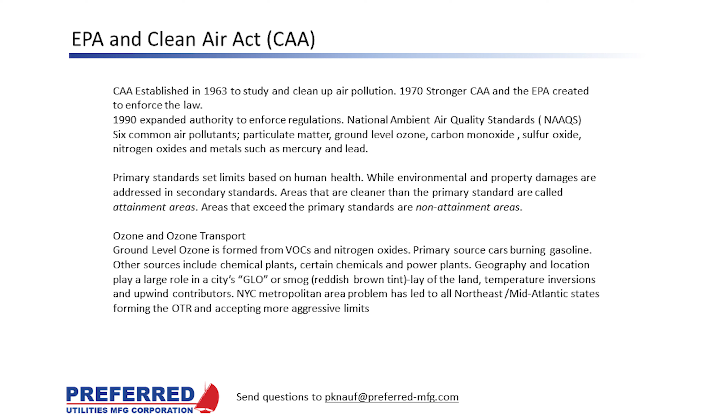For example, the New York City metropolitan area has a large problem, and that's led to the formation of the Northeast Mid-Atlantic states, forming the OTR, or Ozone Transport Region, and they've accepted more aggressive limits to their emissions.

So these are the Clean Air Act National Ambient Air Quality Standards table. You see carbon monoxide standards of 9 ppm, nitrogen dioxide primary standard of 100 parts per billion, ozone, particulate pollution, and sulfur dioxide. The limits can be lower in certain regions, but cannot exceed these national standards.

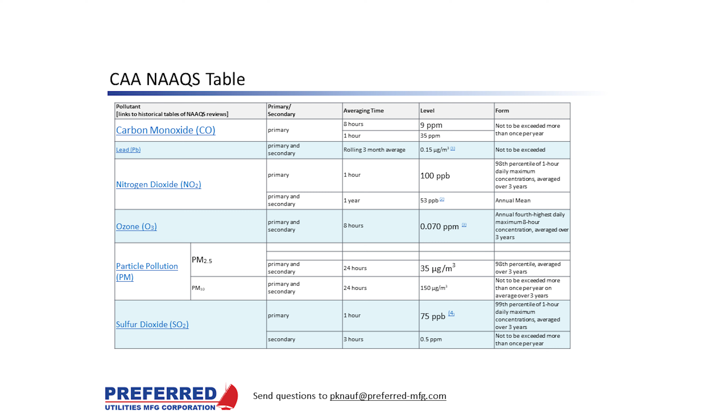If you ever notice a spec or documentation, quite often it's expressed in pounds per million BTU. This is the way you convert from parts per million to pounds per million BTUs for the various fuels, as well as for the chemicals, the pollutants that we are going to be talking about today. So this is a handy chart to print out and save.

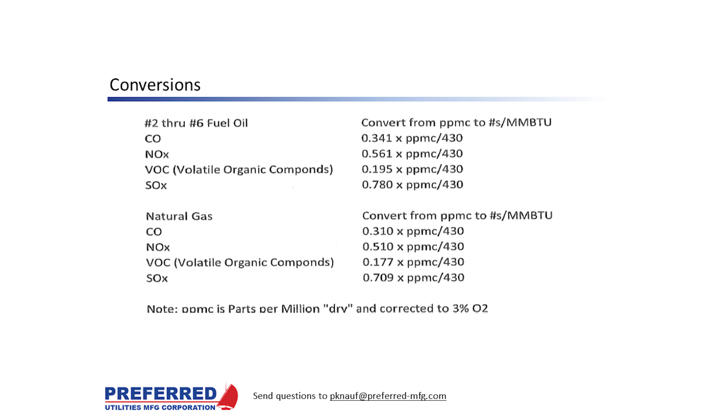Surveys show that the public perception is we are emitting more today and air is getting much worse. Despite this overwhelming perception, the U.S. is doing quite well. Actually, the developing nations are contributing to most of the world's pollution.

As you can see in this table, the EPA is tracking air quality from 1980 to 2018. Carbon monoxide emissions have gone down by 83% in those 38 years, lead by 99%, primarily through taking lead out of car fuel, gasoline. Nitrogen dioxide is down by 65%. Ozone is down by 31%. They didn't collect particulate matter data back then, not until 2000. And sulfur dioxide emissions are down by 91%.

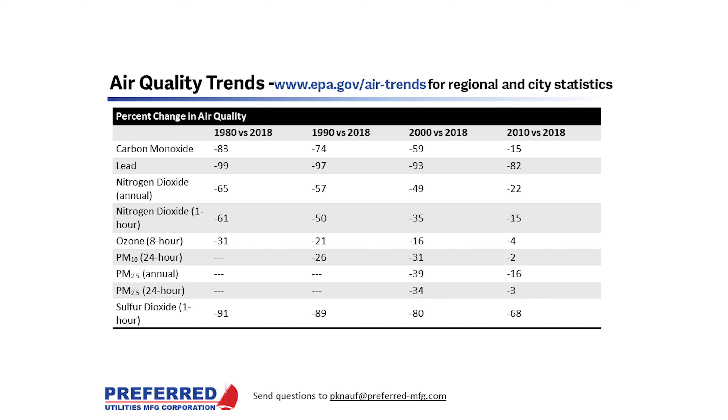Here's another way to look at it, a nice, little easier graph, where the center line of the x-axis is the most recent national standard. As you can see, all the various pollutants are tracking down and are considerably below, most of them are considerably below the national standard.

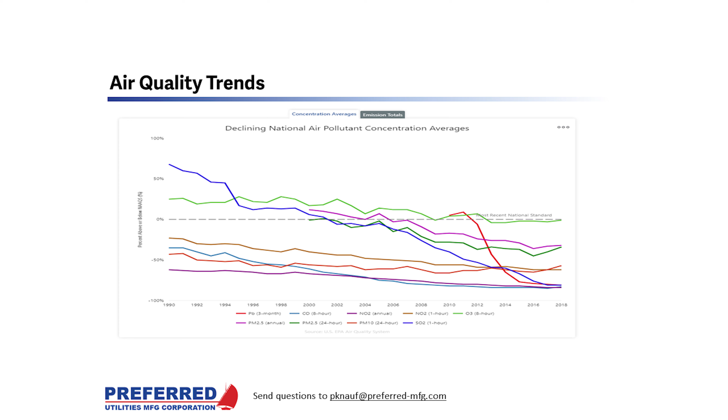The U.S. NO2 air quality from 1980 to 2018, as you can see, we're above what is now the national standard of 100 early on, but about the early 2000s we dropped below that standard, and today we're quite a bit below that. That's measured as the daily max 1-hour average.

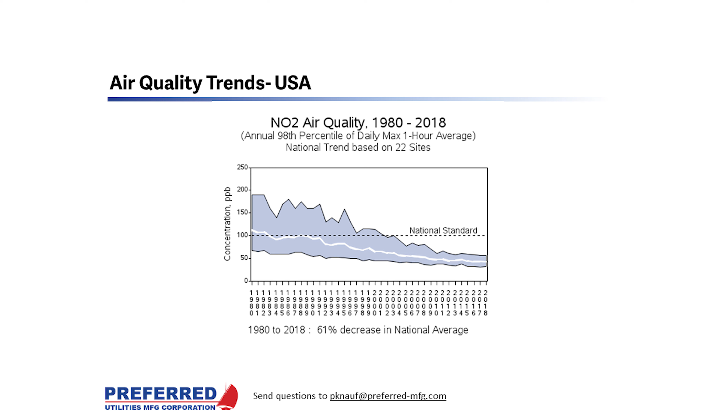Since most of us are in the Northeast, this is a graph showing the Northeast emissions from 2000 to 2018, the same daily max 1-hour average. So that's a 34% decrease in the regional average.

There are three main ways to reduce emissions: pre-combustion choices, combustion methods, and post-combustion methods. We're going to discuss those separately.

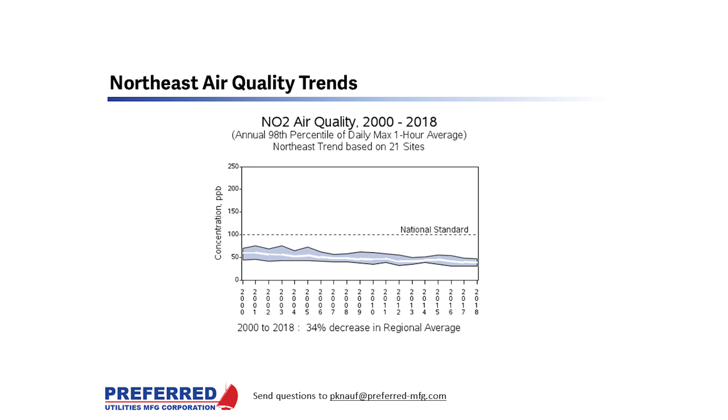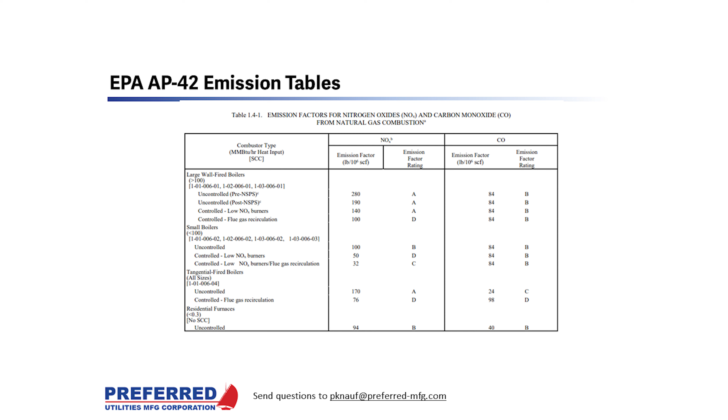The emission factor rating simply indicates the quality of the data, the number of sample sets that they have to back this data up.

Another table here shows emission factors for the criteria pollutants and greenhouse gases from natural gas combustion, listed as carbon dioxide, lead, N2O, particulate matter, sulfur dioxide, total organic compounds, methane, and volatile organic compounds.

Now, most of these statistics you're going to see are going to be corrected to 3% oxygen. It's very important that you do that, since not many installations are right at 3%. So when you look at the raw data, you must always correct it to 3% oxygen.

David, is that wet or dry oxygen? It really doesn't matter. If you're measuring NOx wet, you would use your wet O2. If you're measuring NOx dry, you would use your dry O2. As long as you're consistent, the formula works.

It is important to note that combustion has pass-through components. Pollution from sulfur, lead, mercury, and particulate matter are not influenced by combustion technology. They're in the fuel and pass through the combustion process.

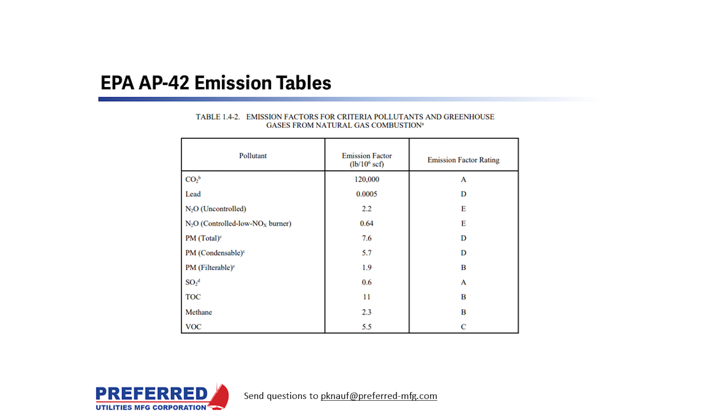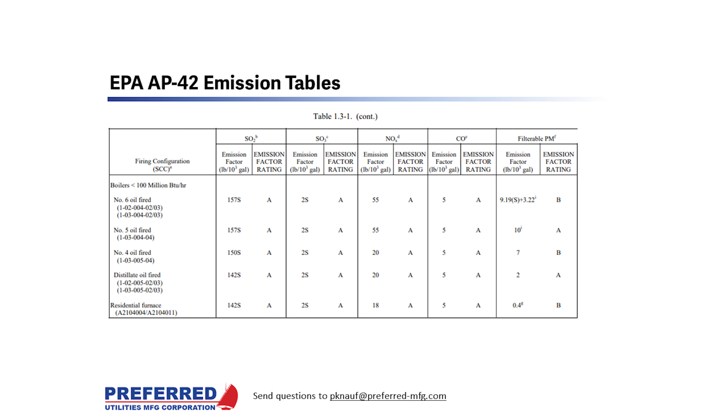Table 1.3.1 shows various fuel oils' expected emissions for SOx, NOx, and CO for different size types of fuel oils. It's important to see the differences in residential furnace emissions as well, compared with the previous slide on natural gas emissions. So far, we've discussed pre-combustion techniques to reduce emissions, mainly fuel selection.

Next, we'll talk about operational changes, but I want to take this time to point out the EPA website and the wealth of information available there. Earlier, you saw air trends that came right off the EPA website, and recently you saw statistics on fuel characteristics. All this and more information is available at epa.gov.

So next we're going to start talking about operational changes to reduce emissions. Obviously, there are things like good boiler tuning and lean excess air that can improve performance and efficiency in any operation. But mainly we'll be discussing the reduction of pollutants that are not pass-through pollutants, by optimizing combustion and efficiency through improving the combustion process.

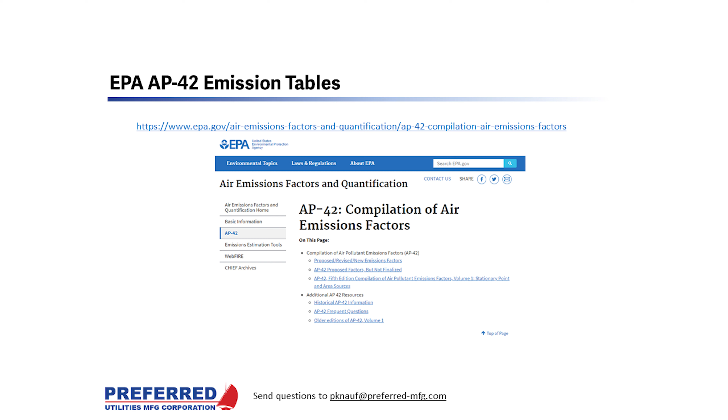Focusing on NOx emissions, NOx is usually 97% nitric oxide and 3% nitrogen dioxide, but it is formed in three distinct ways: fuel NOx, thermal NOx, and prompt NOx.

Fuel NOx is oxidation of the nitrogen molecules attached to the hydrocarbon chains inside the fuel. Thermal NOx is NOx formed by disassociating nitrogen molecules in the air that join with the oxygen in the air to form nitric oxide. So two distinct different areas and sources for the nitrogen.

And finally, prompt NOx, which is formed from the rapid reaction of atmospheric nitrogen with hydrocarbon radicals.

Now, I wanted to insert here where we've seen pollutants characterized in a few different engineering units. When you see pollutants characterized as parts per million, it's important that you correct for the oxygen level in the stack, because that influences the statistics.

You take the formula shown here: actual NOx times (20.9 minus 3) divided by (20.9 minus your actual measured oxygen). And this works for CO as well as any of the other stack pollutants.

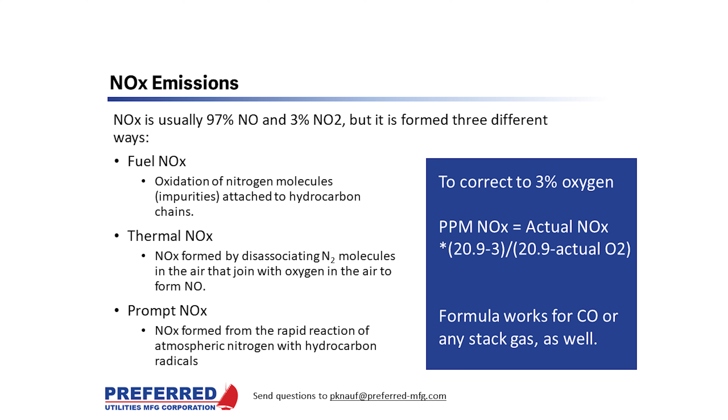Fuel NOx reduction involves the oxidation of the fuel-bound nitrogen molecules attached to the hydrocarbon chains. For single burner boilers, the only way to reduce it is by burning cleaner fuels. Multiple burner boilers, larger boilers, can use fuel staging techniques to reduce NOx.

The strategy there is to convert the hydrocarbon fuel to carbon monoxide in a sub-stoichiometric or fuel-rich environment, and then convert the CO to CO2 and water vapor in a high excess air environment.

This can be done in utility boilers through burner tuning, over-fire air ports, and putting some burners out of service. Obviously, these methods are not available in a single burner boiler or furnace, and the only way to achieve that is by changing the fuel.

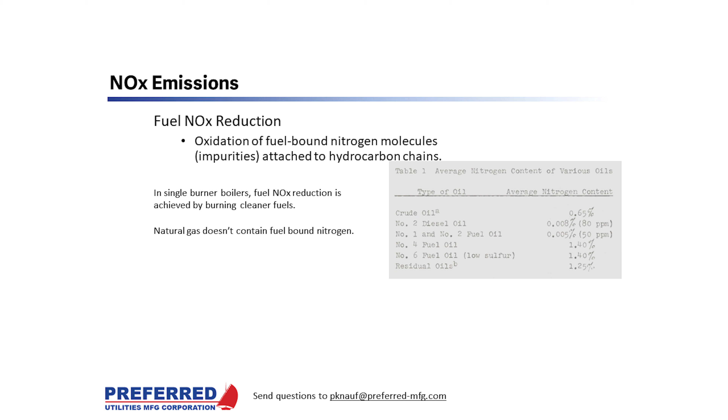Thermal NOx reduction: the disassociation of nitrogen molecules in combustion air follows an Arrhenius relationship, meaning the percentage of nitrogen molecules broken into nitrogen ions has an exponential relationship to temperature.

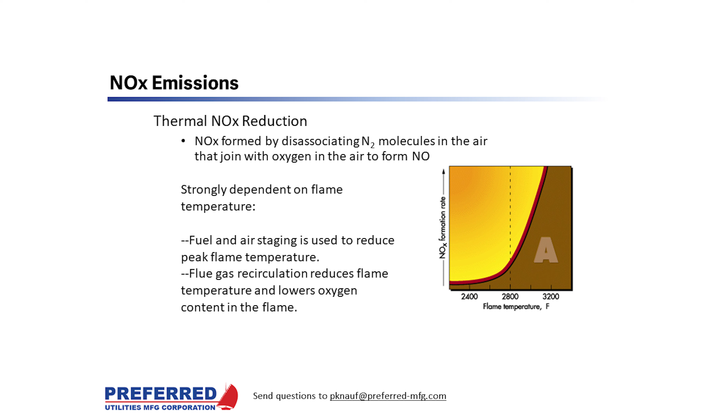To reduce thermal NOx, combustion engineers reduce the peak temperature of the flame. This is done with burner fuel and air staging to slow combustion, and flue gas recirculation that spreads the enthalpy of combustion over a higher mass flow, lowering the oxygen content at the flame so more nitrogen radicals reform into diatomic nitrogen. Reducing oxygen concentration, increasing nitrogen concentration, reducing peak combustion temperature, and reducing the time combustion gases remain at elevated temperature all reduce thermal NOx formation.

FIR is a NOx reduction technique applicable to boilers that burn gaseous fuels only. It's similar to FGR, except a portion of the flue gas is mixed with the fuel instead of the combustion air. This technique lowers the peak flame temperature, reduces oxygen concentration in the combustion zone, improves fuel-air mixing, and reduces the time under NOx formation conditions.

When the same volume of flue gas is used, FIR can be more effective at reducing NOx than FGR. To minimize confusion, caution should be exercised when encountering the acronym FIR, since it's used to represent both fuel-induced recirculation and forced internal recirculation.

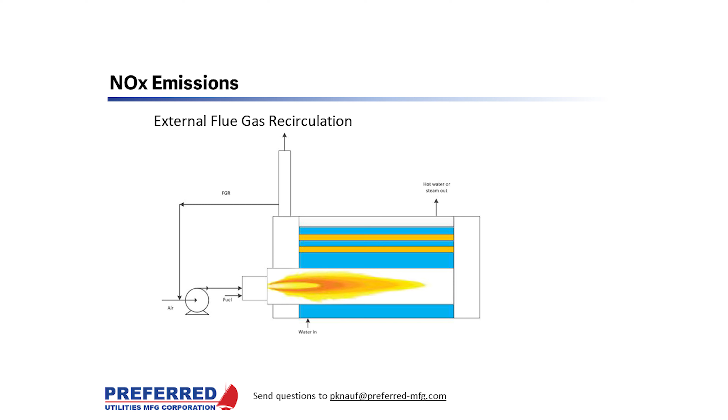This schematic shows external flue gas recirculation, which reduces combustion temperature by externally feeding flue gas from the stack or the last pass of the boiler back into the combustion air, where it mixes in the fan or wind box and is reintroduced into the furnace. It's very effective against thermal NOx formation, though this technology is a bit older, going back to the 1980s.

Prompt NOx: the most effective NOx emission control strategy reduces NOx formation as much as possible while affecting boiler performance as little as possible, except in advanced burner concepts where air and fuel are premixed. Combustion at either low or very high excess air levels results in low NOx formation. For most low NOx boilers, the best combination of low NOx formation and high boiler efficiency occurs when the oxygen amount is just enough to ensure complete combustion.

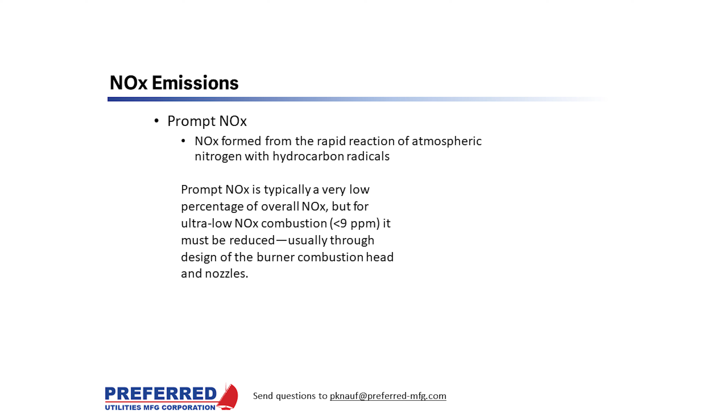Operation at very low excess air levels can cause problems. It can result in incomplete combustion and formation of CO, decreasing boiler efficiency. It can also create unsafe conditions inside the boiler that can lead to an explosion.

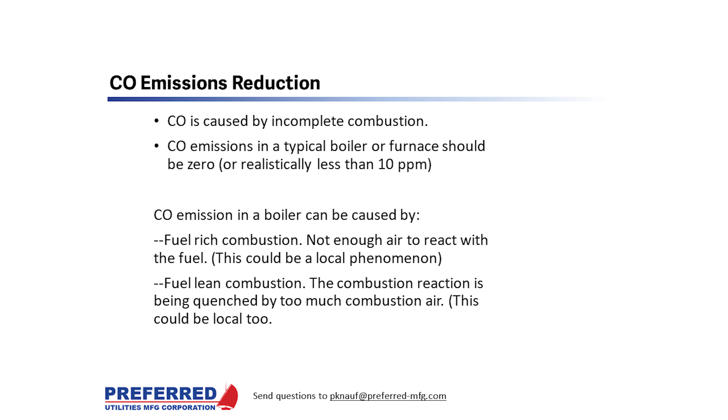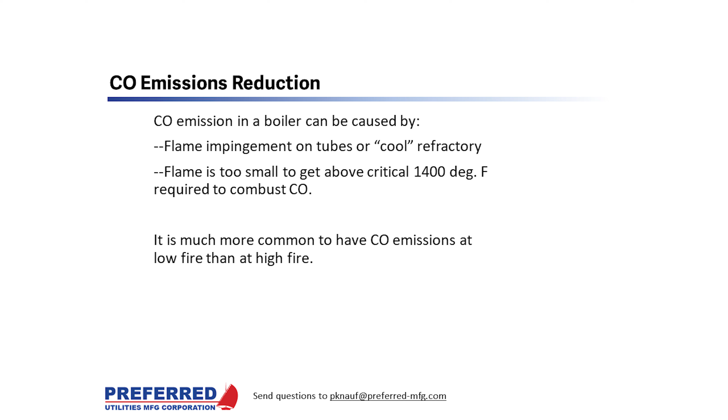CO emissions reduction: CO is caused by incomplete combustion. CO emissions in a typical boiler or furnace are realistically always less than 10 parts per million. CO emissions are caused by fuel-rich combustion with not enough air mixing with the fuel, or too lean combustion with too much combustion air. It can also be caused by flame impingement on the tubes, furnace wall, or cool refractory, or by a flame too small to get above the critical 1400 degrees Fahrenheit. It's much more common to have CO emissions at low fire than at high fire.

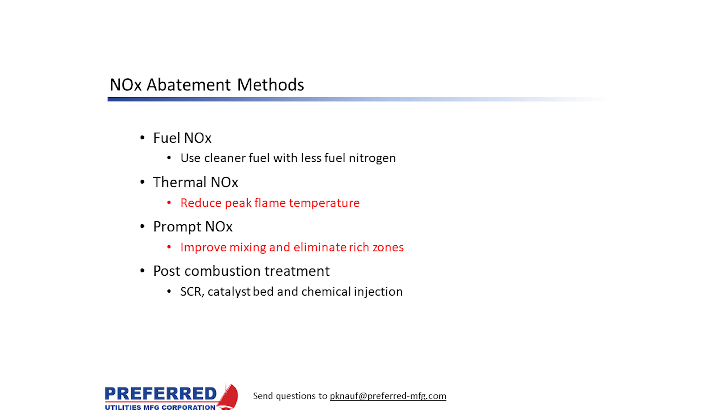Okay, so I'm Dave Eoff, sales manager at Preferred Utilities. I've been a burner combustion engineer since the early 1990s, and I actually worked in Southern California where low NOx technology really started with Rule 1146, which mandated that if your boiler didn't have a low NOx burner on it, you had to trash it and install one. So we were very busy retrofitting boilers to low NOx burners in the early 90s.

And as those slides from Peter show, we've done a very effective job at reducing NOx emissions in the United States - so much so that when folks like Peter and I talk about emissions, we assume we're talking about NOx, CO, and SO2. It seems like anybody under 30 doesn't really know what air pollution was in the United States.

So when you talk to them about emissions, they immediately start thinking about CO2. And CO2 is what we're going to talk about now, and how you can reduce CO2 emissions in the boiler.

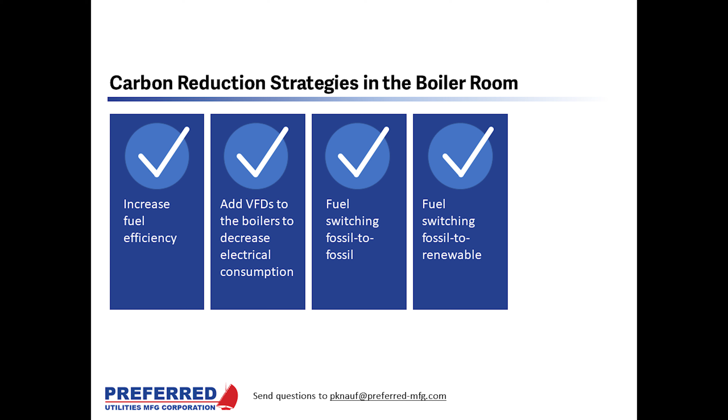We're going to start small and end big, beginning with fuel efficiency improvements you can make in the boiler room. It stands to reason that if you burn less fuel, you're going to release less carbon. We've been using various technologies over the last 30 or 40 years as fuel prices have increased to increase the efficiency of burners for the economic payback. But by decreasing the amount of fuel you burn, you also decrease the amount of CO2.

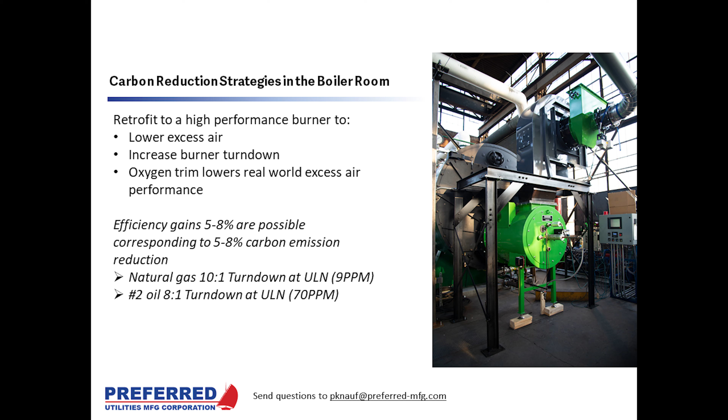So what you can do, you can retrofit to a high performance burner that will lower excess air, increase burner turn down, and if you employ a control system known as oxygen trim, you can lower your real world excess air, or operating excess air, even further. So efficiency gains of 5 to 8% of fuel consumption are possible, and that corresponds to 5 to 8% carbon emission reduction.

Another thing you can do is reduce the amount of electricity you're consuming in your boiler room. We do this by replacing across-the-line motor starters with variable speed drives. Usually we will start with the biggest blowers or motors in the boiler room, and that's usually the forced draft fans on the burners. We might put VFDs on the induced draft fans, and sometimes on the feed water pumps. But typically we start at the largest motor because that's where the ROI is the most, and that's the FD fan. The conversion between electricity and CO2 depends on where you are.

The way to calculate this is to go to the EPA's website. They have a calculator there called AVERT, which is an acronym for something or other. The national average is you release 7.07 times 10 to the negative fourth tons of CO2 per kilowatt hour reduced. That number varies from place to place depending upon how much fossil fuel is used to create electricity where you live.

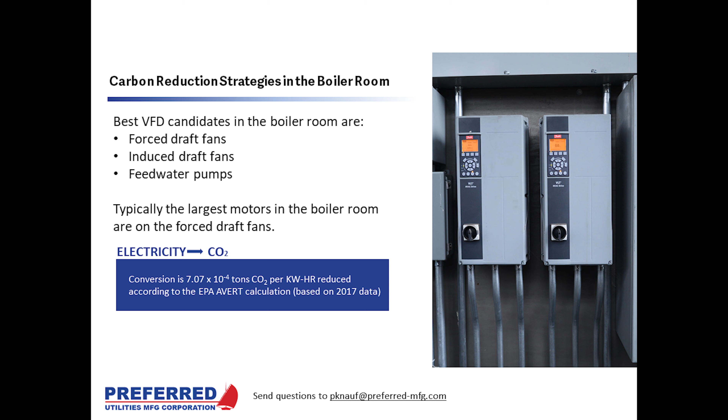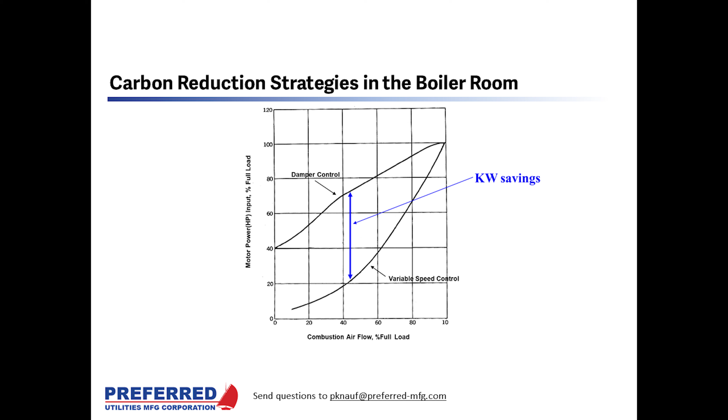When we put a variable speed drive on the FD fan, we'll use a little bit of damper control at low fire, but the goal is to get that damper open as quickly as possible as you move up to the higher firing rates. Once the damper is full open, then we start increasing the VFD speed. So that gap between the top curve and the bottom curve is your brake horsepower, or electricity kilowatt hour savings.

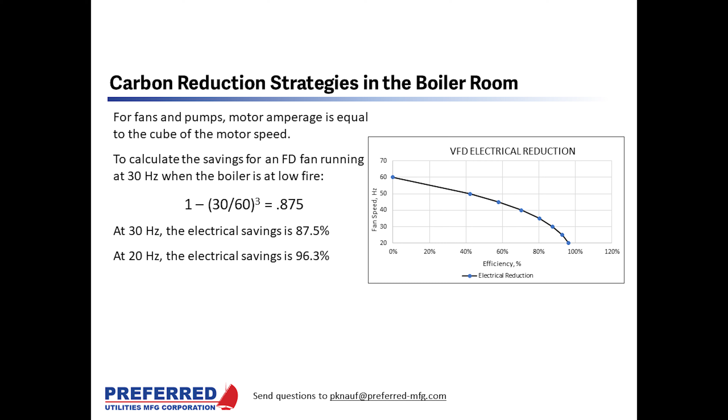This is the equation you use to calculate electrical savings for different VFD speeds: 1 minus your actual speed divided by 60, all to the third power. So if you run the FD fan VFD at 30 Hertz, your electrical savings is 87.5%. At 20 Hertz, the electrical savings goes to 96.3%. There's a lot of electrical savings to be had by slowing down your fans. The conversion, as a reminder, is 7.07 times 10 to the negative fourth tons of CO2 per kilowatt hour reduced.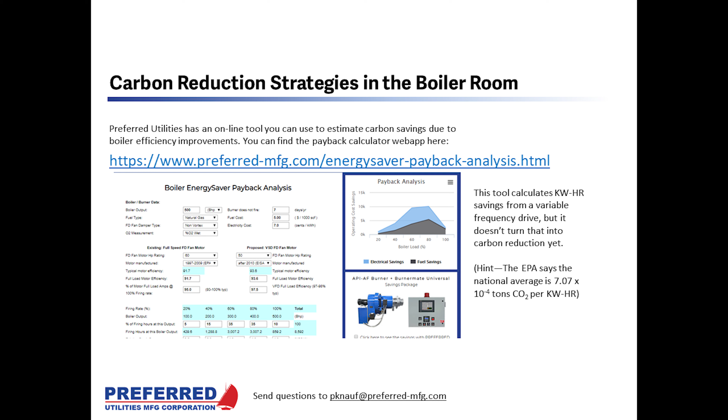To estimate the fuel and electricity efficiency gains possible with a burner and controls retrofit, you can use Preferred's online energy saver payback tool. You input the excess air, stack temperature, and load profile of your existing burner, as well as the performance of the proposed new burner, and the web app estimates your fuel, electricity, and carbon savings. You can input your fuel, electricity, and retrofit costs, and the web app will output an ROI for the upgrade. The web app doesn't calculate CO2 savings from the electricity reduction yet, but it's on our list of things for our programmers to do. For now, you can use the AVERT calculation for your region.

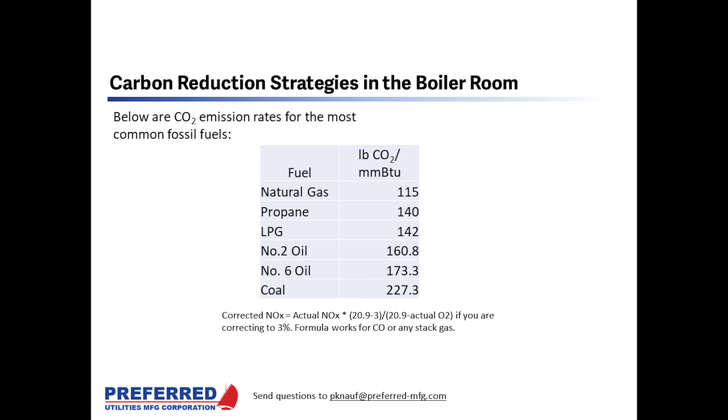So the second strategy you can use to reduce your CO2 emissions is to switch from one fossil fuel to another, switching from a very carbon-intensive fossil fuel to a less carbon-intensive one. This chart shows the pounds of CO2 produced per million BTU of different fuels. Natural gas is the lowest, and different types of coal are the highest.

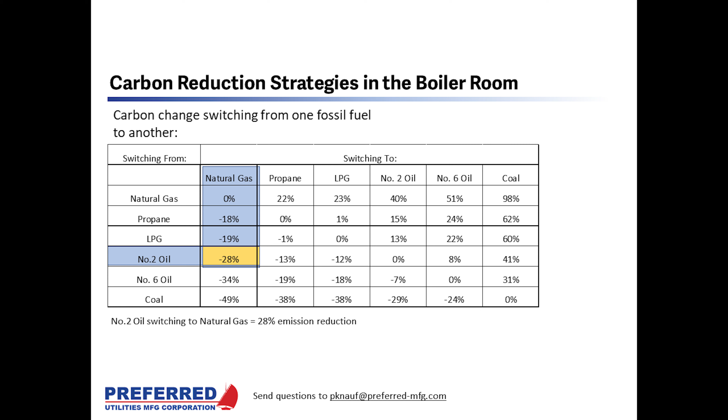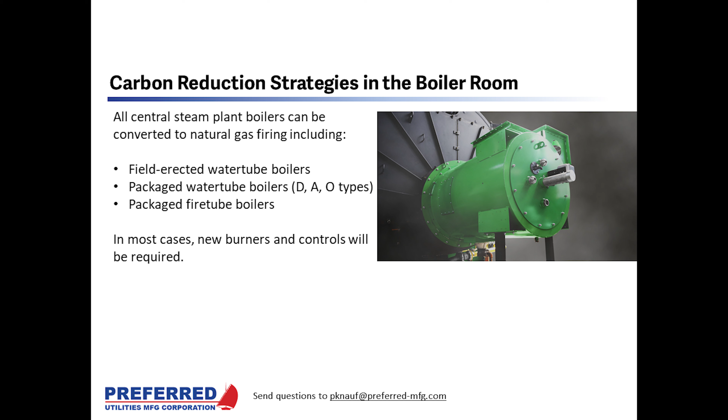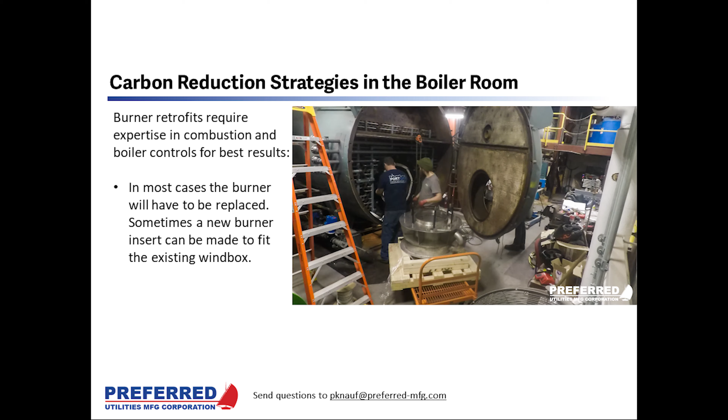Burner retrofits require expertise in combustion and boiler controls for best results. In most cases, the burner will have to be replaced. Sometimes a new burner insert can be made to fit into the existing wind box.

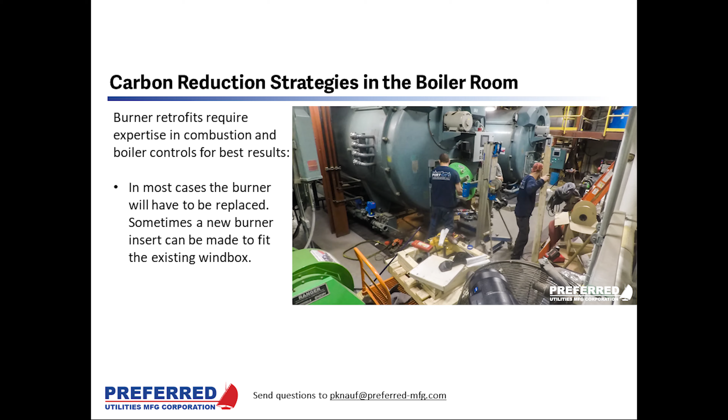This video shows a crew replacing the burner in a trademarked Cleaver Brooks boiler with a new preferred burner. As you can see, with guys working really fast, this was done in 41 seconds.

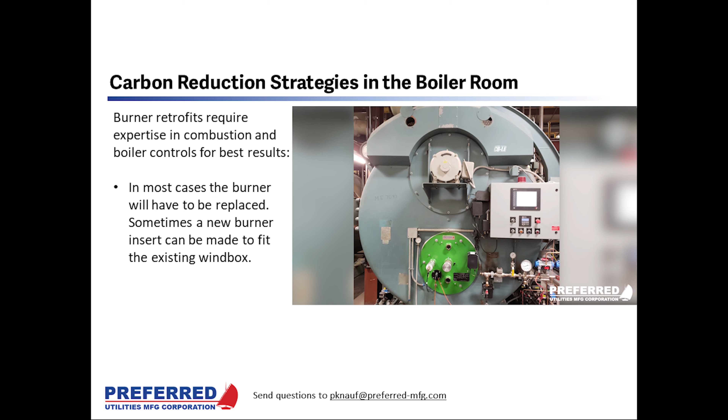This was a fuel switching project at Bates College, where they switched to a renewable fuel and achieved an 82% carbon emissions reduction, but I'm skipping ahead.

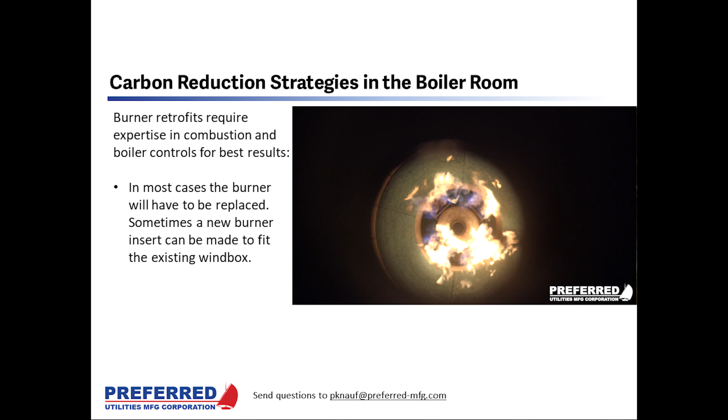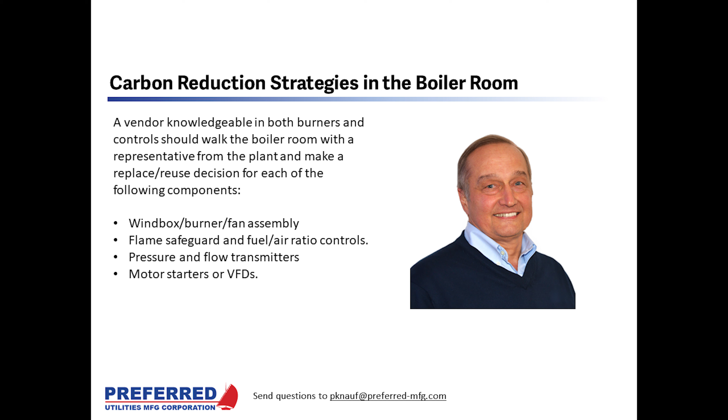When you're doing a burner retrofit, it's important to include a vendor knowledgeable in both burners and controls who will walk the boiler room with a representative from the plant and make a replace-or-reuse decision for each of the following components: the windbox burner fan assembly, the flame safeguard fuel-air ratio controls, instrumentation including pressure and flow transmitters, motor starters, and VFDs. Why spend money replacing perfectly good equipment if it will work with the new burner?

So the final carbon reduction strategy we're going to talk about is converting from a fossil fuel to a renewable fuel. The idea with renewable fuels is we are taking carbon that was already in the biosphere and burning it, not carbon that was 8,000 feet under the ground in the form of fossil fuels. So when we talk about landfill gas, digester gas, or some of the liquid fuels coming up in a few slides, this is carbon that was recently trapped and we're putting it back into the atmosphere, not long-cycle carbon from the dinosaur period.

Everybody in the boiler burner industry is familiar with landfill gas and digester gas. Both are renewable fuels made from renewable sources, and we've been burning these fuels since at least the 1980s. The problem is they're gaseous fuels that can't be economically transported any distance. Even if you had the real estate to put in a lagoon or a digester in the middle of your campus, you wouldn't want to because of the smell.

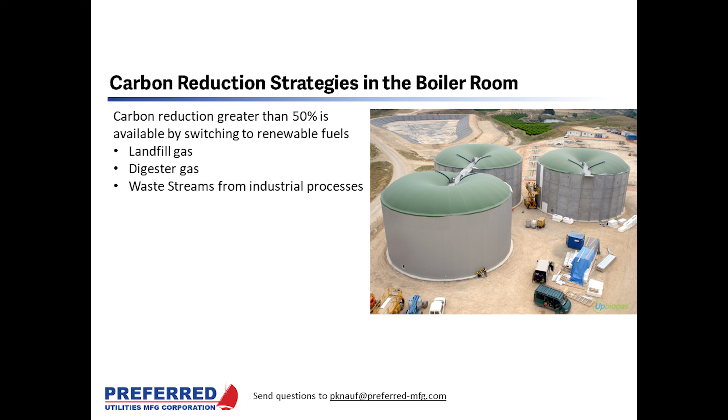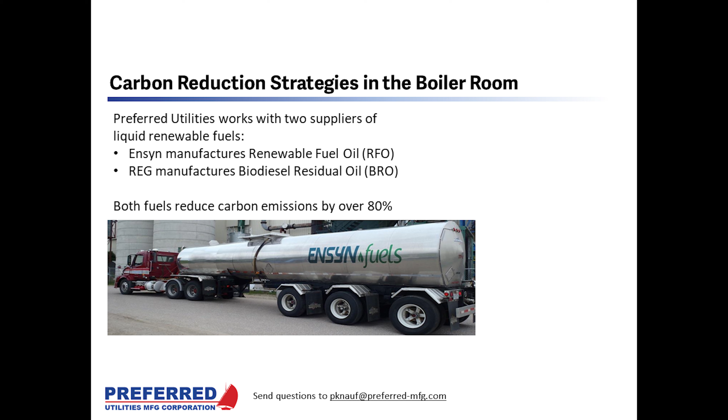Preferred works with two suppliers of liquid fuels. Ensyn manufactures a fuel called Renewable Fuel Oil, or RFO, and REG manufactures a fuel called Biodiesel Residual Oil. Both of these fuels are liquids, so they can be put on a truck or a rail car and delivered directly to your facility from where they're made. This unphotoshopped picture is proof.

Ensyn makes renewable fuel oil, or RFO for short. It's made from tree trimmings from harvest residues or commercial tree plantation thinnings. If this biomass wasn't made into RFO, it would be burned or left to decompose, and the CO2 would have hit the atmosphere soon anyway. RFO has been approved for all regulatory credits for renewable fuel oils, including RINs and RECs.

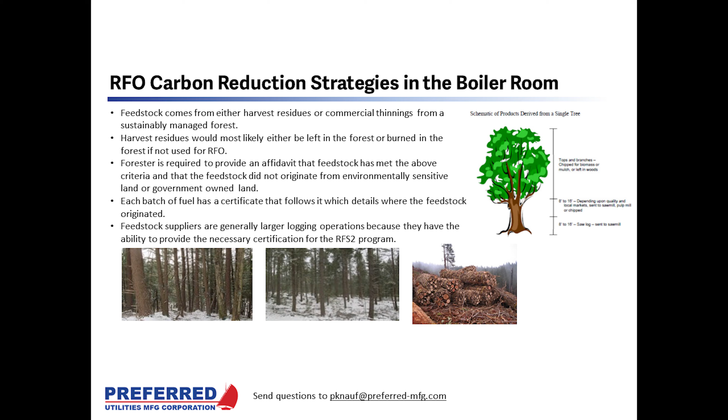This is a very simple diagram explaining where RFO comes from. The end products are liquid smoke, renewable feedstock sold to petroleum refineries, and RFO for steam and hot water plants. By the way, when you burn RFO in your boiler, it produces a very nice wood smoke aroma. RFO is considered to be biogenic.

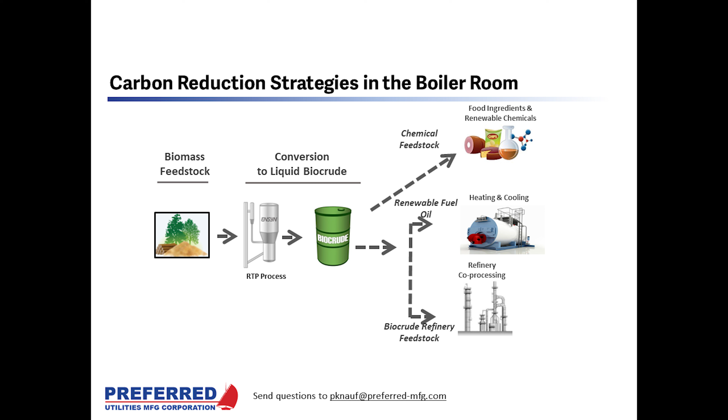Greenhouse gas emissions from RFO are about 88% lower than number 2 oil and 82% lower than natural gas. Virtually any fire tube or water tube boiler can be converted to fire RFO. RFO is acidic, so everything in contact must be made out of stainless steel.

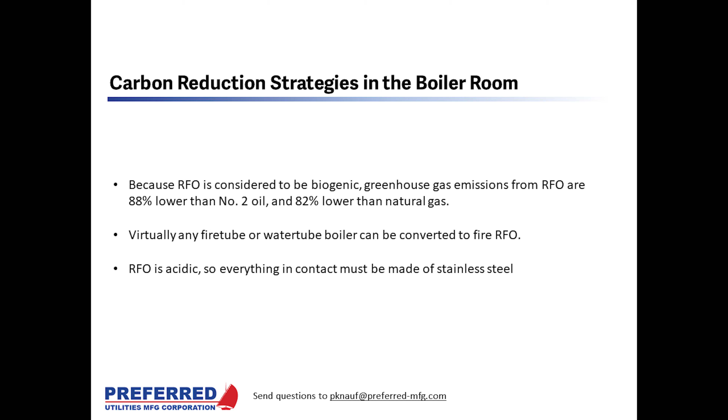The greenhouse gas emissions reduction for this fuel isn't 100%, because it does take some fossil fuel to make the renewable fuel and to transport it to the plant where it's going to be burned. Ensyn, the manufacturer of RFO, typically amortizes the cost of the fuel conversion in a 5-year fuel contract.

Even with the fuel switching costs, the price of RFO is close to the price of natural gas on a comparable BTU basis. Preferred has converted boilers at 3 facilities to RFO: Bates College, Youngstown Thermal, and a CRNC facility in Ontario, Canada.

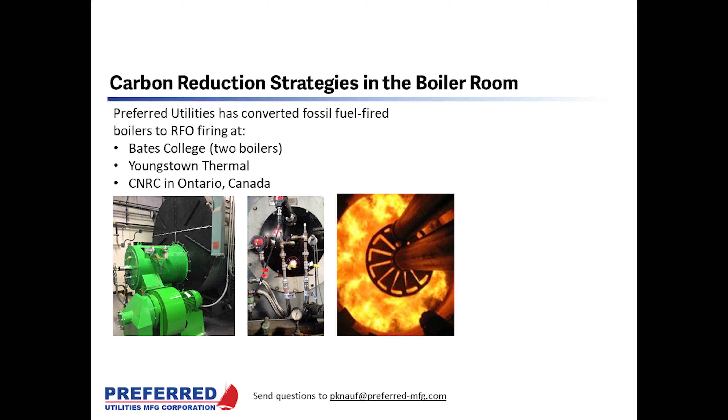The video I showed you earlier was Bates College. They've converted 2 of their central steam plant boilers to RFO. As soon as our technicians finished tuning up the new burners, Bates issued a press release touting their success reducing greenhouse gas emissions at their campus. The URLs are there, or you can Google the words Bates and Renewable and you'll find these articles. Last summer, Bates announced that they are greenhouse gas or carbon neutral, mainly because of efficiency improvements to the campus and converting their central steam plant over to RFO.

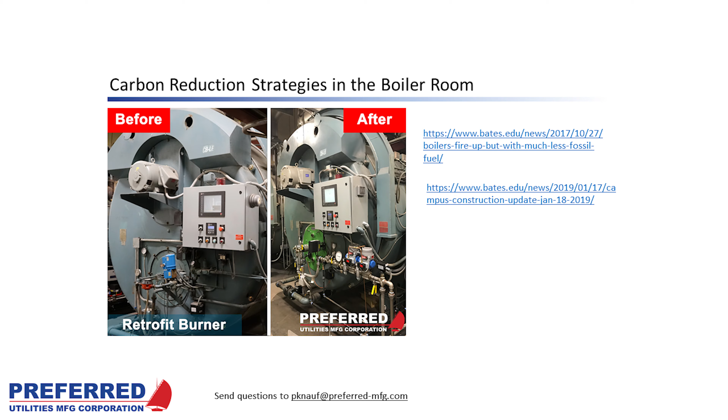Preferred is also working with REG, the nation's largest supplier of biodiesel. They make a fuel called Bioresidual Oil. Think of bioresidual oil as the number 6 oil of biodiesel. It has the appearance of dirty French fry oil, but it has actually undergone extensive cleaning to remove impurities such as ash, heavy metals, and water.

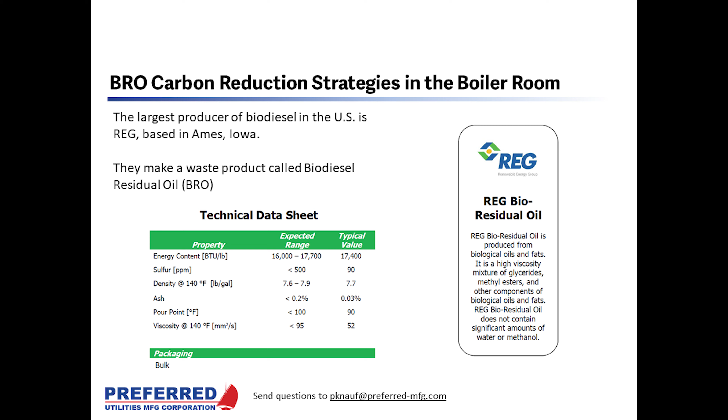Preferred started burning bioresidual oil in our 2 shop boilers in June 2 years ago. The burner on the left is a 1950s vintage Preferred rotary cup burner designed to fire number 6 oil. The burner on the right is our state-of-the-art low-emissions Ranger burner. They are both burning bioresidual oil.

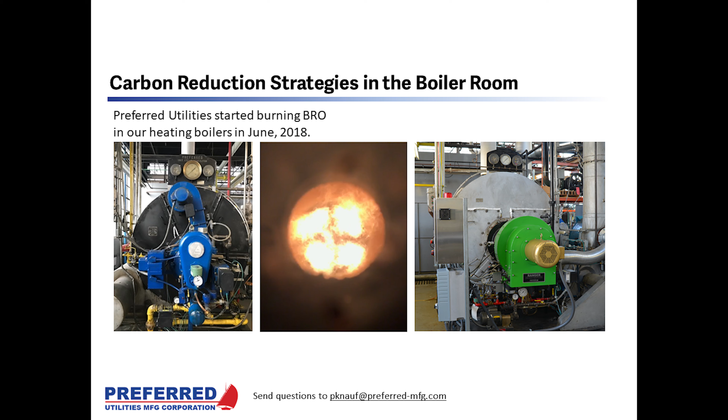This is the startup data from one of the 2 boilers. Important things to note include bioresidual oil needs to be heated to 160 to 165 degrees F. If the existing burners that you're trying to burn bioresidual oil in are using number 6 or number 4 oil already, they will have a pump and heater set that could be reused.

Note, the combustion efficiency is similar to number 2 oil. Stack CO is less than 10 parts per million. This is considered clean combustion for any fuel. Opacity was 0 throughout the boiler load. In fact, these burners were firing number 6 oil before we changed them out to bioresidual oil. It took no new equipment, not even a new oil tip, to burn the bioresidual oil.

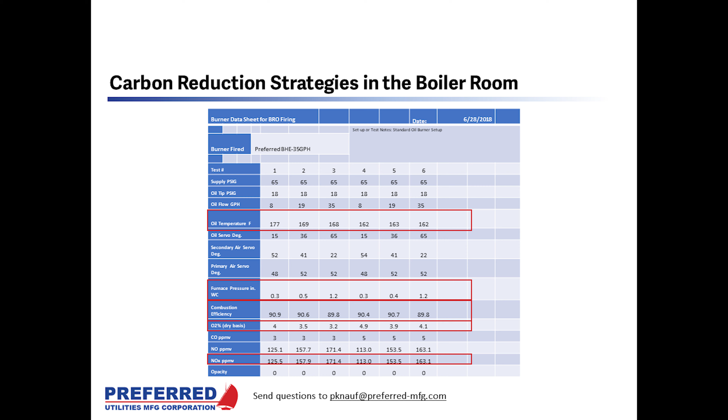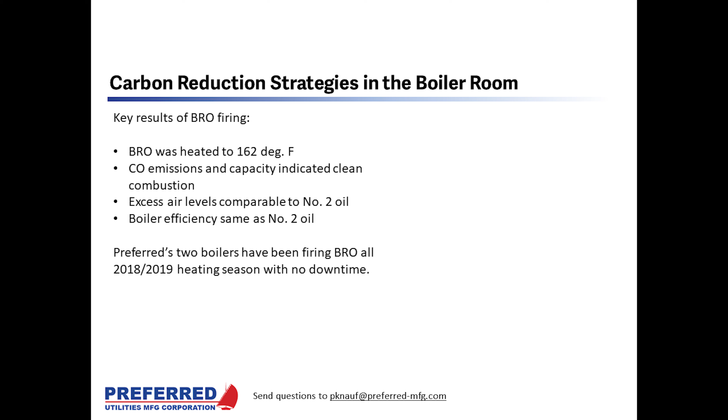Preferred's 2 boilers have been firing bioresidual oil all through the 2018-2019 heating season and the most recent 2019-2020 heating season with no unplanned downtime. We shut down these boilers each summer, we open them up, and we've found no unusual ash or sooting of the boilers. We fired them up again last summer for a show and tell with no issues at all.

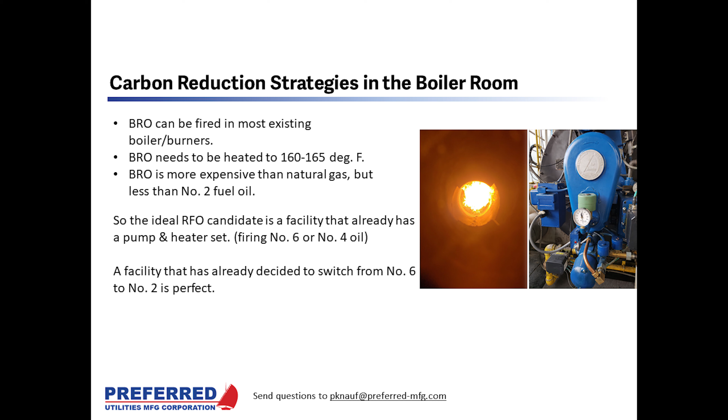The price of bioresidual oil is generally less than number 2 fuel oil. Fuel switching costs vary widely depending on the existing combustion equipment. So the ideal bioresidual oil candidate is a facility that already has a pump and heater set, so already firing number 6 or number 4 oil. They can reduce their greenhouse emissions by up to 80% and spend less for fuel than number 2 oil. There are a lot of facilities in the Northeast that are still burning number 6 and are planning to switch to number 2 in the near future. These plants can switch to RFO or bioresidual oil and exceed all existing and proposed carbon emission reduction goals.

So that's my part for reducing carbon emission in your boiler room.